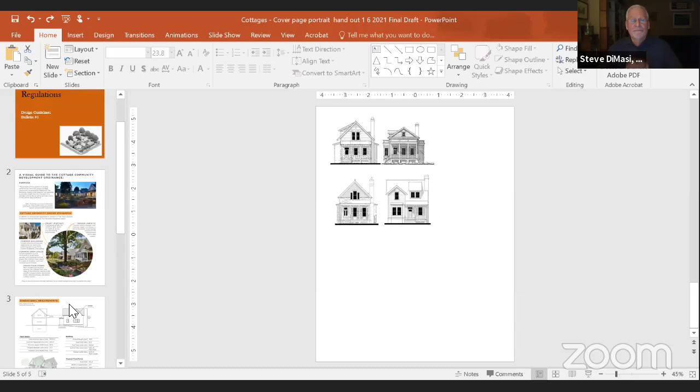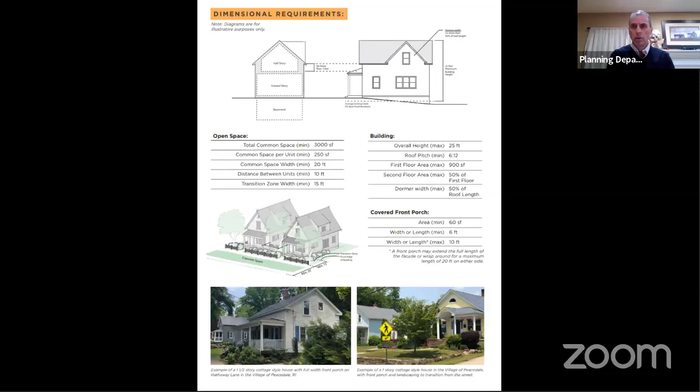So, can everyone kind of see this area, this slide? Or I can go back to a non-PowerPoint presentation and blow it up. Is everybody comfortable looking at this? I can see it okay. Can you see my cursor as I move it around? Yes.

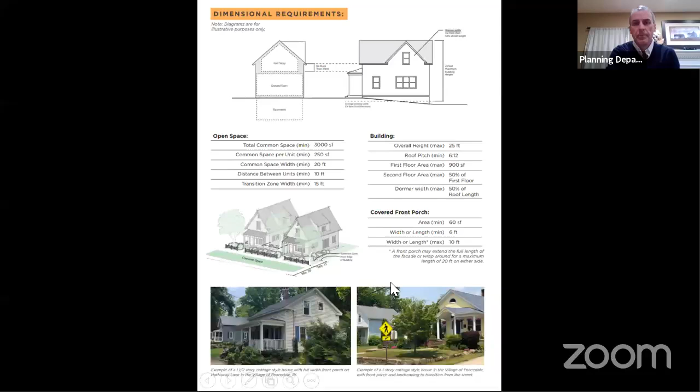Okay, so we added within this discussion - if there's a common space, call it a miniature town common or green associated with the cottages - there's typically a sidewalk or interrelation between a public space, and then we've added a semi-private space, either before you enter the porch or just outside of it. So the sidewalk isn't immediately at the stoop of the home; there's some intermediate area, and that area is to be no less than 15 feet. I'm going to exit this for a minute and go back to the Word document.

Jamie, is this a flyer you're going to print or just have it online? We would be able to have it as a printout that we could hand out.

My only comment looking at the handout you gave us with the dimensions, like the common space and the 10-foot separation on those cottages, it's a little blurry. I thought maybe it was just the printing quality, but if you could brighten that font somehow. Yeah, I can work with Union Studios to clean that up. It's very difficult to read, especially that 10-foot separation. At least I thought so.

Also, on both the handouts you sent us, it doesn't give you a total square foot area for what those two buildings are on. I'm looking at the handout, which is similar to that same center drawing. Okay, I'll go back to that in a second, Maria.

So in the regulations, item H is kind of new from last month, and it's really this transitional area. You own your house, then you have a porch associated with that, and there's a transitional zone between your porch and a public space to give a little relief from a public area. You'd typically have that in any development in town where you have the town road and sidewalk. There's a little room before you enter a porch, usually set by the town setback or an established setback within a community. This is pretty standard with the cottage regulations, and Union Studios, as well as Jeff Davis and I, discussed it and came up with this language.

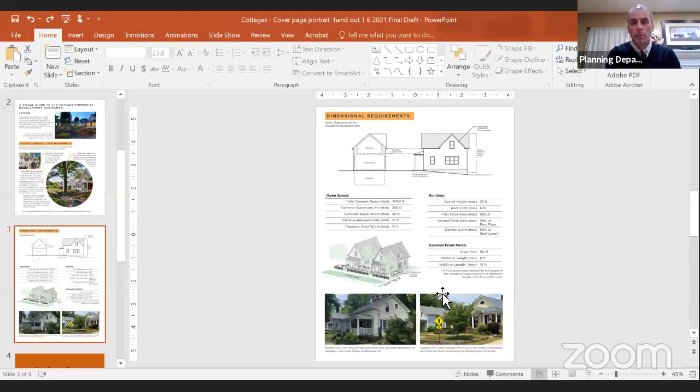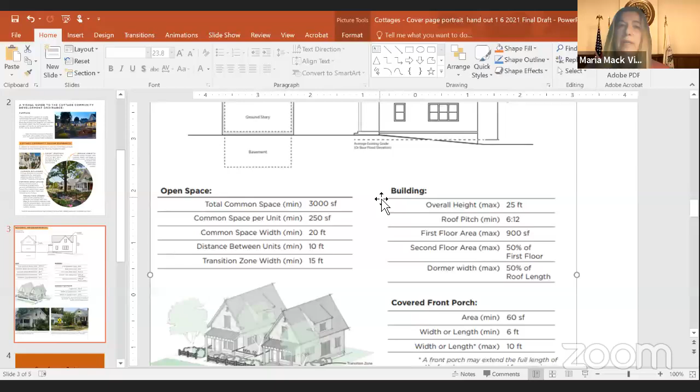Maria, I'll go back to that PowerPoint slide. What I'm going to do is not go to the presentation, but enlarge this. So you're talking about the center of this slide, Maria? Yeah, more specifically, it relates back to the conversation we had last time, about how the parking, the open space, and the buildings fit on a particular lot.

Because we really haven't, until this point, had a lot of drawings as far as architecturals, but we haven't had any diagrams that demonstrate how you would fit X amount of cottages on a lot, whether it's an acre or what have you, because you may recall that when we looked at it last time, the 15 lots per acre didn't add up mathematically.

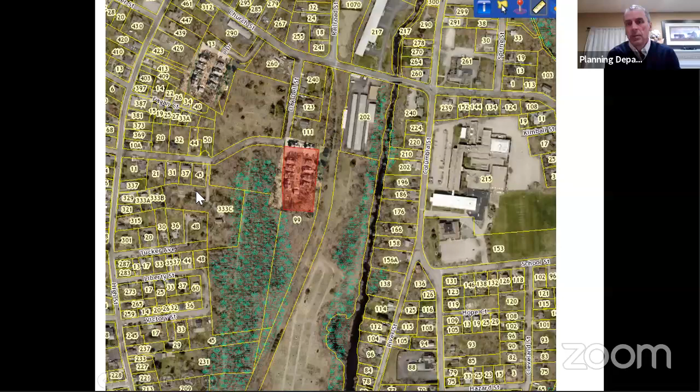Again, the nice thing about this photo is it shows traditional single lot development just to the right of it.

Here there is one larger lot, 3 lots that have been combined and actually have a condo project on it. So again, here's, we'll say 1970s-80s development where someone combines 3 lots, builds one large condo unit. There's no common space. It's basically the 3 units, parking.

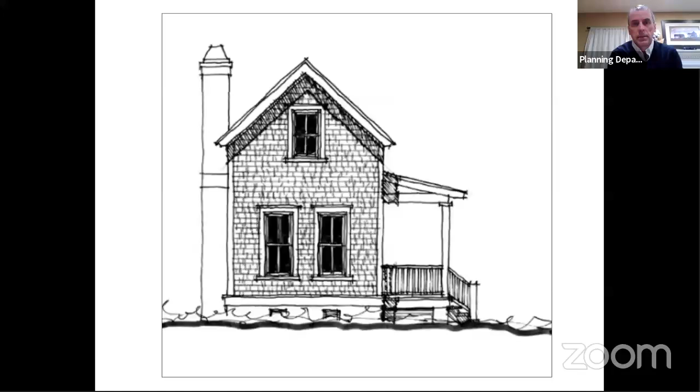An alternative to that is the cottage. And then let's go down a couple. Again, some of the architectural samples we looked at. I did shorten the chimneys for Peter. And a couple, just looking at 4 of those in a row.

So does anyone have any questions or like me to expand on some of the items I showed you this evening? I had a couple of questions. Of the examples that you showed us, how many of them were located so that they were in a kind of central core area where they can walk to goods and services, which was one of the major topics of where to locate these type designs?

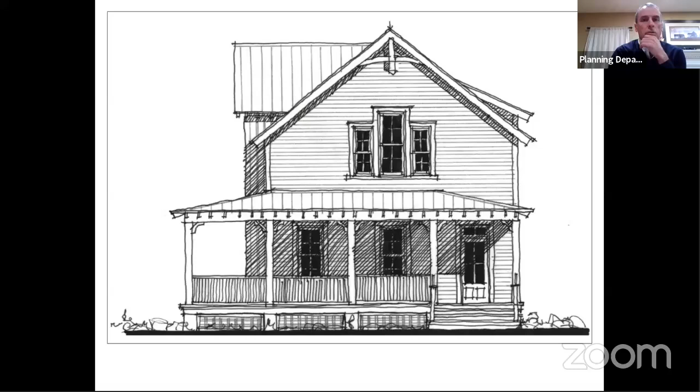The West Concord one, Maria, is. And let me go back to my PowerPoint here. So the West Concord one, this is the development, and the commercial area is just to, in essence, the northeast of this development. There are sidewalks linking this main road to this development.

One thing that's interesting about this one is impact. There are 2 commercial buildings, office buildings in front of this, but in Concord, the price point of this home right here would be about 1.4 million in this downtown setting. They didn't have a view of this before. This is the view that they have now.

These homes to the left here are in the price point of 1.6 million apiece. Again, different price point, but you have that single family, large scale home where the character of what their neighborhood may be perceived as has changed. Of course, that's also within the 128 corridor, so values up in that area are pretty high.

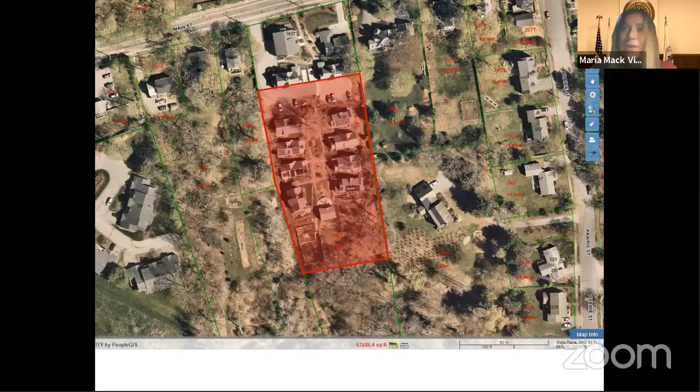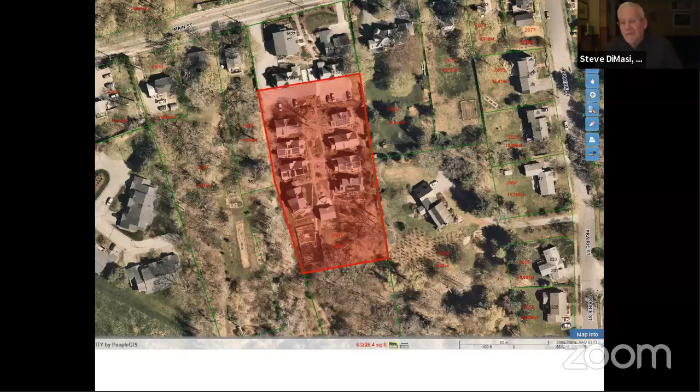Yeah, Concord is a beautiful place, Maria. But also an area where you'd want to have some housing available to younger families. Yes, with that walkable, close to downtown aspect.

Maria, the other one is the one in Redmond. Again, you could say the one in East Greenwich is close to it. Yeah, this one in Redmond was relatively close to the downtown.

Jamie, the one in East Greenwich on Green Street, can we see that again? Was the parking also in one spot for that development? Parking in one spot for that.

I'll try, just bear with me. I'm going to take, if everybody would like, I won't. I can take you to another development using Google Earth and just kind of show you when you're doing the cottage type developments, a lot of times you're going to have these isolated parking areas where literally it may be a couple hundred feet to walk to your unit. There's an example off of 495 in Massachusetts where they did that.

I had an opportunity to talk to a few residents there, and initially they thought it would be inconvenient. They almost had to convince themselves that this was a good thing, to buy into this type of development and walk every day. But they understood their walk from the car to their unit was kind of an alone, quiet time to de-stress before you left the office at your car and work. In that little 5-minute walk, you kind of changed mentality between work and I'm at home. You also had an opportunity to interact with some of the residents within the community, versus you drive in.

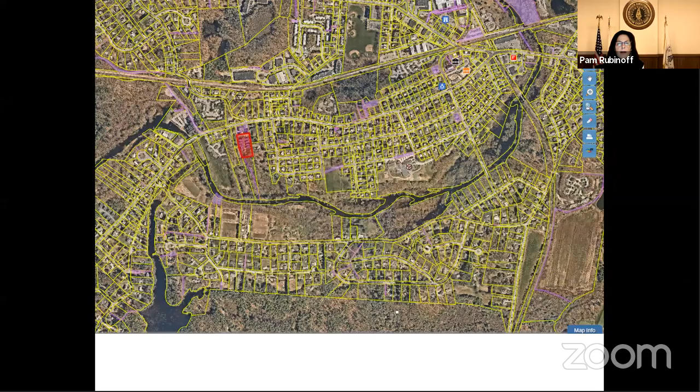Was that in the handout? That's contained within the regulations. No, but what I'm saying is that I didn't see anything in the handout regarding parking. In essence, in the 2-page handout, it doesn't discuss garages within that.

Okay, then I was just wondering if we ought to put anything about parking or garages or something like that in the handout. So that was just a question or thought.

Potentially what we could do in that handout, and it may be one thing the handout is lacking, is if I pick one classic, perfect rectangular development with Union Studios and say, this is what represents a cottage community. Maybe it's just this lower rectangle, where we're looking at this as a cottage development.

In some communities, you would see these units here may have an underneath garage. Some of the communities will end up, in the East Greenwich example, that this may become a garage.

If everybody would like, I could take you to potentially the two developments in the Massachusetts area that just show you an example of that. I think I can get to them quickly using Google Earth.

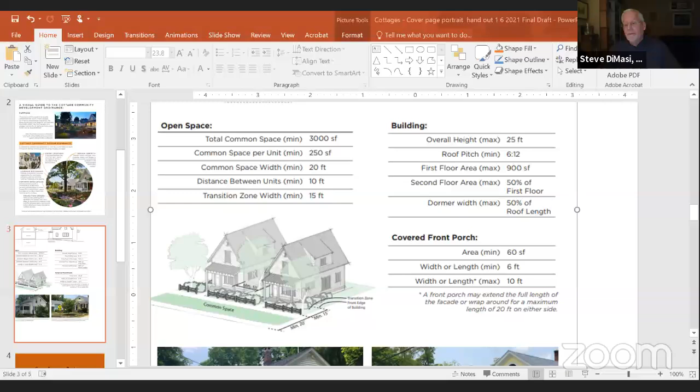Jamie, while you're looking for that, the cottages are excluded from accessory apartments. But when we talk about a garage, is there any language that would prohibit it if somebody has a 1-car garage and they want to finish it?

If someone has a 1-car garage, say it's not the original owner, it's been sold, and they said, oh, I'd like to have more living space - would they be allowed under these cottage units to take that garage and expand their living space?

I think the difficulty there, in most instances, it's going to be a condo association. You're not going to own the lot, and I would say most HOAs are going to prohibit that conversion of the apartment. In most instances, the developer is going to be pushing up against their density calculations, so if someone added a unit, it's going to run amok of the density calculations that you approved.

Okay, I'm just thinking of a what-if, you know, again, they didn't want the garage, they wanted more living space. Would they be allowed to do it?

I was gonna say, am I still screen sharing? No. All right, so just give me a second here and I'll get to my area.

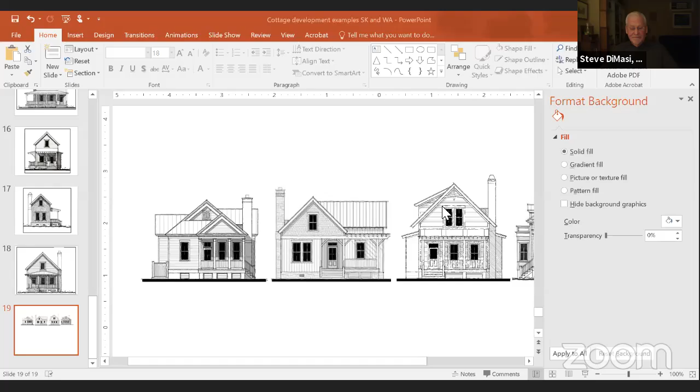This one, Maria? Maybe it would help if I shared the screen, right? Sorry about that. Yes, that's it—the one you were discussing.

Yeah, I thought this was interesting because it showed diversity in terms of the design, yet you could see them all fitting in within a development. So I thought that was interesting.

I think there are two aspects, Maria—you bring up a good point that the handout is part regulatory along with the words. Amy, correct me if I misspeak since we have legal counsel here, but I don't think there's anything preventing the commission from, in addition to the written text—the 2-page guideline, front to back with a cover page and a back page—also providing a prospective applicant direction on what the commission has found to be appropriate architecture. We can build upon a portfolio as time goes on. I see this as the beginning of a much larger portfolio we can build upon.

So here's what I would say to that, Jamie. This is Amy Goins, legal counsel.

Anything that we adopt as an ordinance has the force of law. If we want to assemble a portfolio for guidance purposes, that's fine. I would just say, let's think about whether we want a separate document with examples of the kinds of developments we'd like to see existing outside of the ordinance versus in the ordinance. I think it makes more sense that it would not be in the ordinance itself, that it would be separate. But we can think about that as we assemble that.

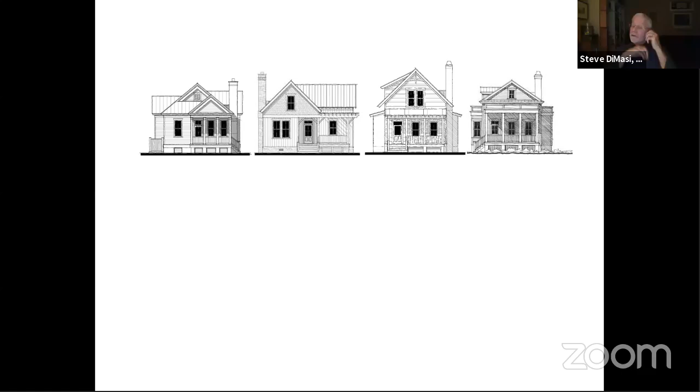Yeah, and it would save a lot of time for the planning board and the applicant if they had an idea what we were looking for and what we didn't like, so that you weren't coming to heads with conflict from the get-go.

Yeah, so if they ask me about architecture, we have photographic examples, but we could build upon this for a home portfolio and say, here's what they look like lined up. I have other examples - I have a couple streetscapes where I've done this.

But again, it's a discussion and we can build upon it so that I'm communicating the right message to a potential developer, articulating the vision of the board, not Jamie or Paul's vision, but the board's vision. So looking again at cottage building and fence design standards, variety in building design, materials, varying roof shapes, gables, windows, visible trim and mullions, roof brackets, dormers, bay windows. It seems like a lot of what we're saying is covered there, and your guidance document is just that, these are examples of things we'd like to see. My question for the rest of the board is, do we think there's enough language there, or do we need to read through it and think about it more?

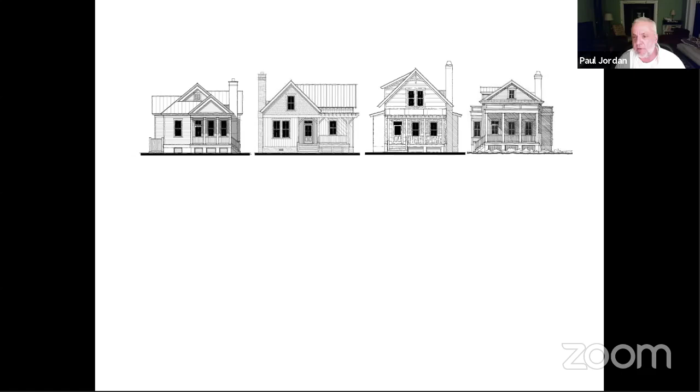I think it certainly makes clear what's expected in terms of variety and the types of materials, but again, I'm new at this. Some of that, and that's why it's nice to have a visual to correlate all those regulations to. Right, but the idea is the visual can be in the guidance, which isn't part of the ordinance, but the ordinance still makes clear what we're looking for. And I think the wording of the ordinance is going to be important so that it's well worded enough that an applicant won't look at it and come in asking for waivers from all these wonderful things we'd like to see in these cottages.

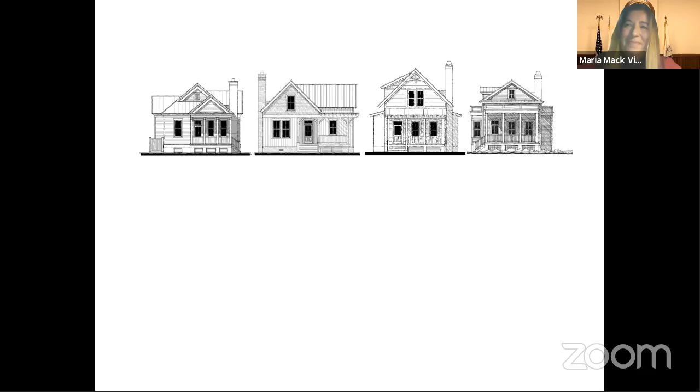Some of the difficulty is, and the visuals really help me articulate your vision and expectations, because not all applicants are created equal, just like planners, commission and board members. A developer may come in and say, look, I have a dormer and a bay window, am I good to go? And as staff, I'm going to look at that development and have the ability to say, yes, you have a dormer and yes, you have a bay window, but that's not exactly what the commission is looking for, that's not the intent of the regulation. Let me show you some samples of what the commission has deemed appropriate.

And again, with samples and language, you can make a cottage regulatory document that's 40 pages long. I don't think Amy and I are steering you in that direction, you have good language contained in 4 or 5 pages, a good 2-page guiding document that tries to articulate some of the words. But I don't think it hurts you, it actually helps to have some other examples articulating that vision and what's potentially acceptable.

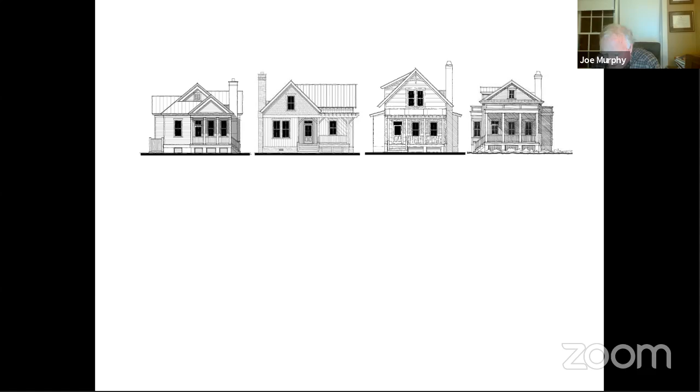Can we go back for a minute to density? Because I kind of feel that if you're trying to put too many houses on a lot, everything else starts falling apart. And I look at what you sent us, Jamie, thank you for those examples. I look at the Kirkland one, which had 7 units per acre, and that looked really good. I looked at the Redmond, which had 8 units per acre, I thought that was good. Then you had the Bainbridge, which was 12 per acre, and I think that could work, but that seems to be the upper end.

When you got into the East Greenwich one, which was 18 units or so, to make that work they had to have a large parking lot, minimal buffers, the houses are very linear, multi-units. To me that starts losing what we're trying to accomplish. I don't know how everybody else feels, but from those examples, in my mind, 12 units was probably the upper limit, or at least that's how it was for me.

I was about to say the same thing. I very much like the Kirkland, Washington one, and I also liked it because it wasn't one big square, I thought that made for a better design. This one? Maria, no, it was just called Kirkland. Okay, and one of the other Kirklands, maybe. I think Kirkland was 7 units per acre, it had sort of a stacked design. I thought it was interesting because it wasn't this monotonous square in terms of the site plan itself.

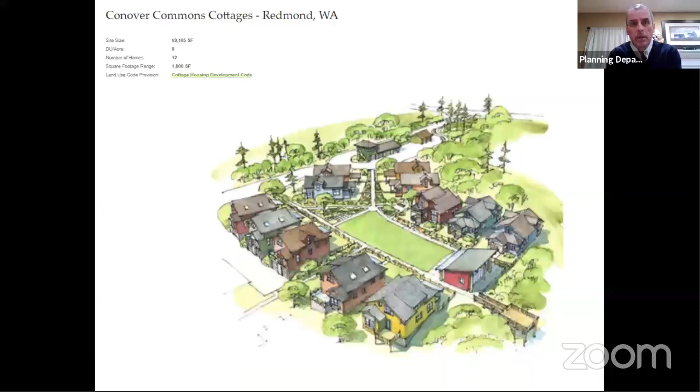I think that the ordinance needs to be very specific about certain kinds of things, what the minimums are, what the intent is, and then it comes into review. We could put some examples in the design guideline of a certain kind of thing and say this is what we're looking for, but we can't predetermine what all of them are going to be. So I think we have to be careful not to pigeonhole ourselves and the developers to one specific model, but these are really good examples to say this is what we're looking for in terms of density, guidance, regulations and look - but we have to be careful that we're not being too prescriptive.

Tammy, you muted yourself.

We've spoken about this before, that we're going to have to try something and then we could adapt it. But if we keep going around ourselves - you guys have done a great amount of work, Peter, you've given some great input, everybody has provided input - so I think we just have to move on to try to finalize something, because otherwise we could rethink this time and time again. My concern is that we need to identify those key things, put in some very clear guidance or regulations, put in some images that reflect some of those things we're saying, and see where it takes us, but we do get review from it.

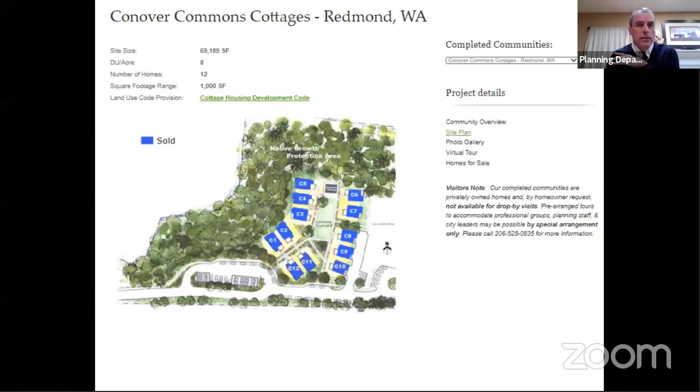I'm trying to go up. There we go. Again, this was, sorry - which is probably your optimum, but 16 homes on 2 acres. That is optimum. Redmond was 8. Here you have 8.

But again, Greenwich is tight. Greenwich is 15 units on 0.5 acres. I use this because it's a local example. The community potentially welcomed it because you saw what was there before. It's a transitional zone between the commercial and the residential.

That's one thing - I had a board member ask me a question in the past couple of weeks about what if someone wanted to do 3 units within a cottage, or 4 together, but maintained the scale and look of the cottage industry. And remember, we're talking about the missing middle. So we probably have A through F on housing types within the missing middle.

We're doing A right now. B, C and D will come. And there's potential as you develop B, C, D type housing, you realize there's a cottage regulation that may be a version, and a B version where a higher density in a transitional zone, similar to East Greenwich, would be appropriate.

Jamie, you raise a good point about the cottages on Green. We keep referring to them because they were the first local one, but there are things that many of us don't like about them, and they're dissimilar to what we might see here because they were essentially a brownfield site. There was remediation associated with it. It's right on a main street, in a transitional area. So that varies considerably from many of the others you've shown us.

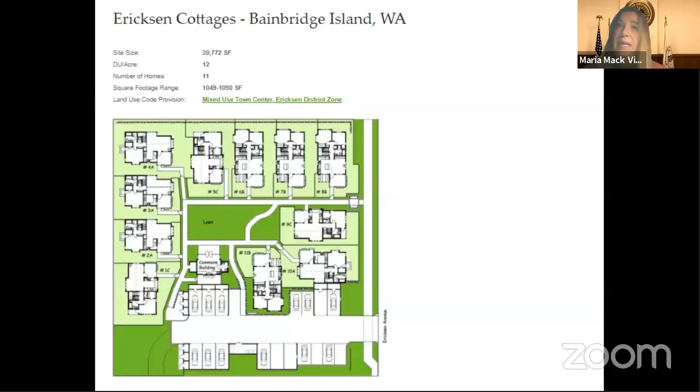And it isn't necessarily the best example, I don't think. I don't like the houses that are cottages that are not true single cottages. And I know there was a considerable amount of issues with stormwater - they had to go back in and correct many problems because of the impervious area, the slope to the site, and the fact that their internal space was a lot of riprap. So even though we're referring to those, that is, in my opinion, not the best example.

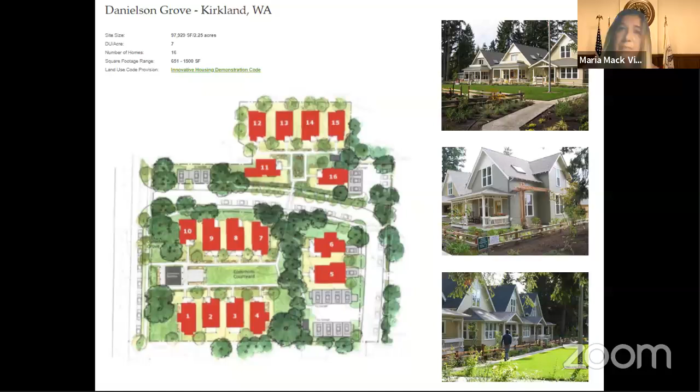But for that location, it still works pretty well. Behind CVS, the parking is almost unnoticeable. It looks like an extension of CVS. There's a parking lot across the street.

And again, it was the first, but I think that one works pretty well right there. If you had a similar transitional area on a main road here in town, rather than on a side road, I think it would work.

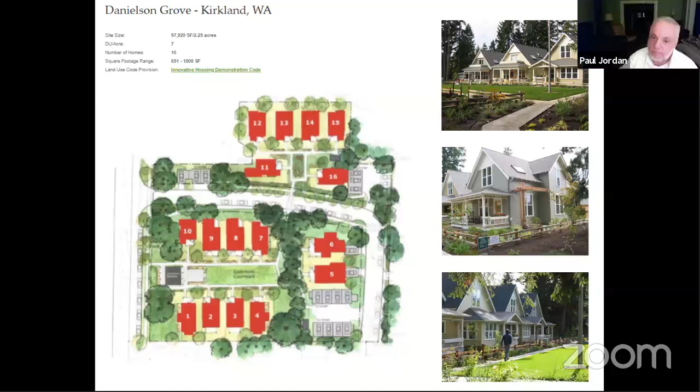I guess I look at this as a really big opportunity for us, not necessarily to look at low to moderate income housing, but to look at worker housing, like blue collar people, and this is one way we can cut the cost of housing in South County and get normal people to live here. So obviously the more density, the lower the price. I mean, we need to control how we do this, and this is one way we can control that. But in the business community, there are tons of people that talk about how they don't have any employees that live in the town they work in, which is too bad. And I think this is an opportunity that we need to look at and take advantage of.

Yeah, that's a good point, Peter. Anybody that has help in town knows, and most of them, if they're young, don't live in town.

And it will probably ruffle some feathers of existing town members to some extent, but if we're trying to really do what we say we're trying to do and get housing low to moderate and get worker housing, I think this is the way to do it. I used to work with a guy who always said you have to break a few eggs to make an omelet. We're going to start breaking some eggs.

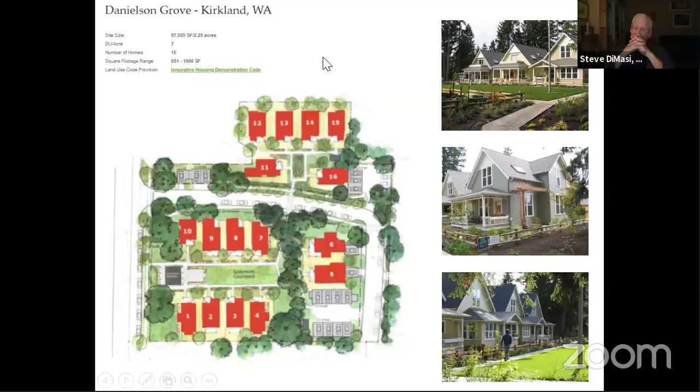Jay, if you spotlight Peter's window, we'll be able to see it full screen. Jay or Brian? Peter's or Jamie's? I'm sorry, Jamie's. I think it's gotta be Brian, because I don't have that option. Yeah, spotlight him. Oh, never mind. Actually, all we need to do is just do a speaker view.